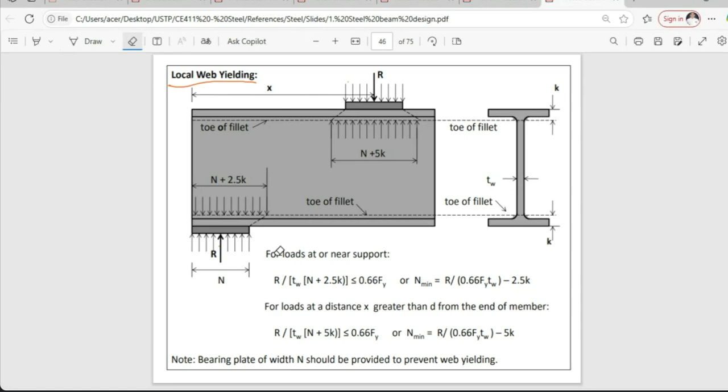Then the other case is when the concentrated load is within the span. So what I was saying is, what if, from your view, the beam is heading this direction, from the top view.

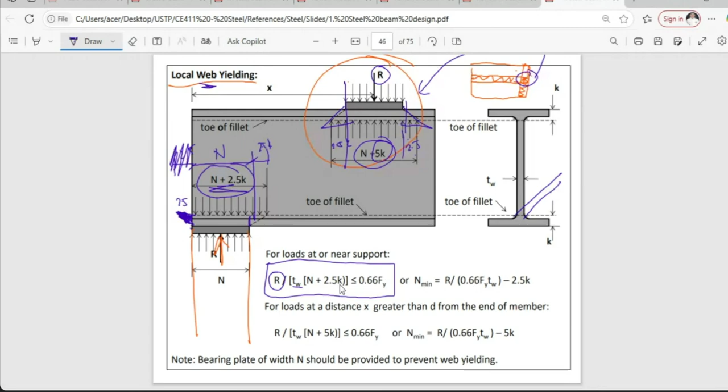K is just a dimension measured from the toe of the fillet, from the weld. When they weld to connect the I-section, this portion is welded, and that measurement going toward there becomes K - from the toe of the weld toward the outermost compression flange, that becomes K.

So, force divided by the area is less than or equal to 0.66 Fy. Simplifying this, K is given, 0.66 is a numerical factor, and Fy is also given - for A36 steel, it's 248 MPa. So simplifying, N is our only unknown with this given condition, therefore we can calculate the minimum N, which is equal to this value.

If that's the reason for calculating this dimension, regardless if it's just 0.1, it can't be rounded down. You must round up. For example, if our dimension is 55.3, normally you'd round down, but for this case, we can't round down for dimensions. Always round up here, so it becomes 56.

But again, dimensions of steel members should be divisible by 5 or 10, so most likely the 0.3 effect gets absorbed, and it will most likely become, for example, 60.

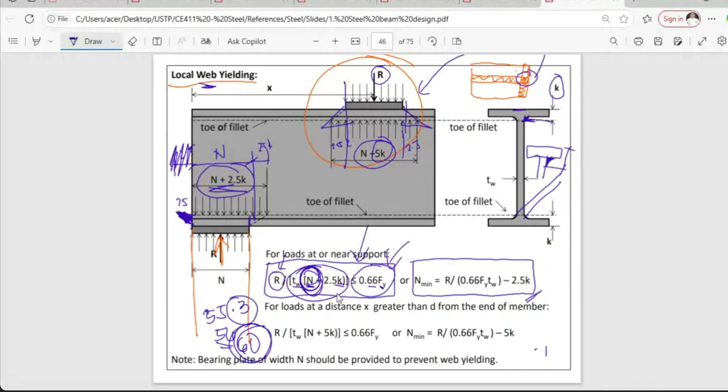As the designer, increasing this dimension will still lessen the stress, because force divided by the area, and the area is in the denominator. So increasing the value of N will decrease our stress. That's fine since our calculation requires less than or equal to.

So regardless of rounding up, it will still satisfy the condition that our actual stress remains less than or equal to 0.66 Fy, even if we round up, because it's in the denominator. Increasing the denominator will lessen the stress, so the less-than-or-equal-to condition is always satisfied.

Then the second case is similar, the only difference is this N plus 5k. As mentioned earlier, it can spread on both sides, left and right, because it is within the span. As long as the application of the force at x distance is greater than D, which is your measurement from top to bottom of the width of the flange.

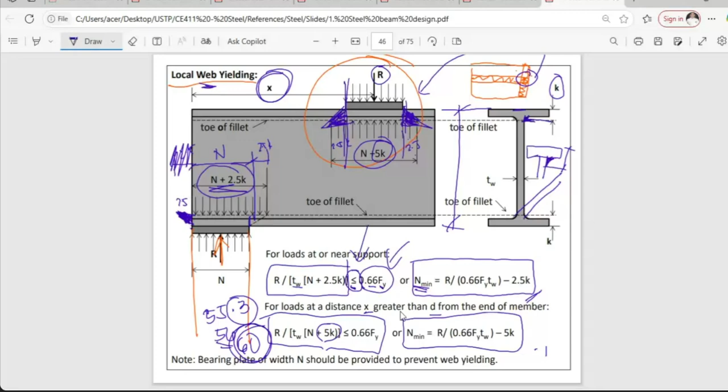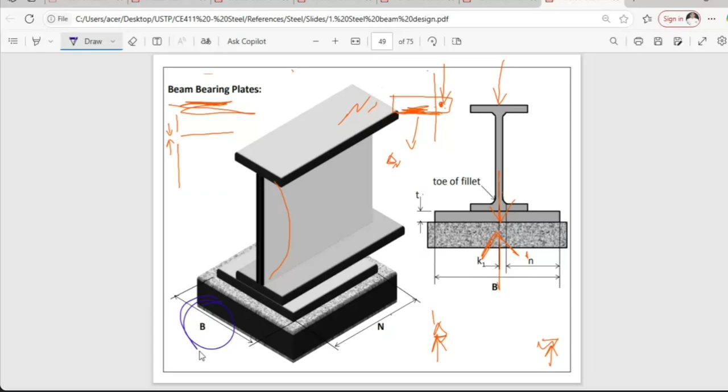So simplifying, you can obtain this. Therefore, when we design a beam bearing plate, we need to design the plate and determine the necessary dimensions. Looking at this illustration, we have a width, a base, and a length N. So our dimensions are the base, the length, and the thickness. This plate is what we need to design, as shown in this illustration.

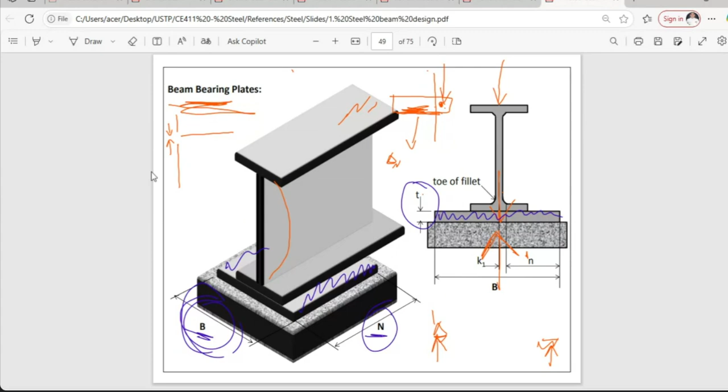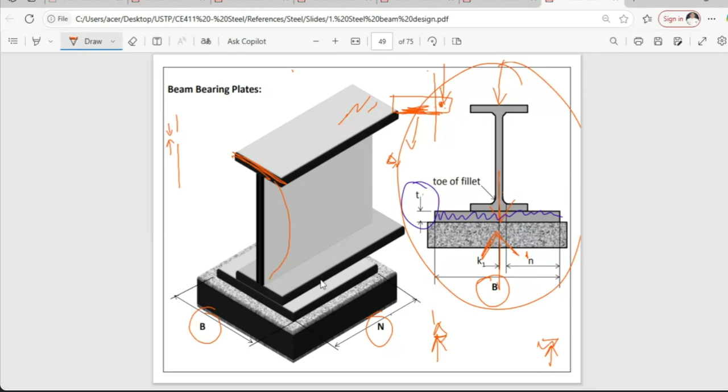So that's okay for the letter width N, which we design first. Taking into consideration that the dimensions must be correctly placed, the base B should not be interchanged. The base is the one parallel to the flange, facing that direction. The side, N, the length, is parallel to the span of the beam. That should not be interchanged. The thickness is fine since it's uniform throughout the dimensions. So we have the base and the length N.

So how will we be able to calculate its dimension? We already have N, so now we calculate the base based on the allowable bearing pressure and the actual bearing pressure.

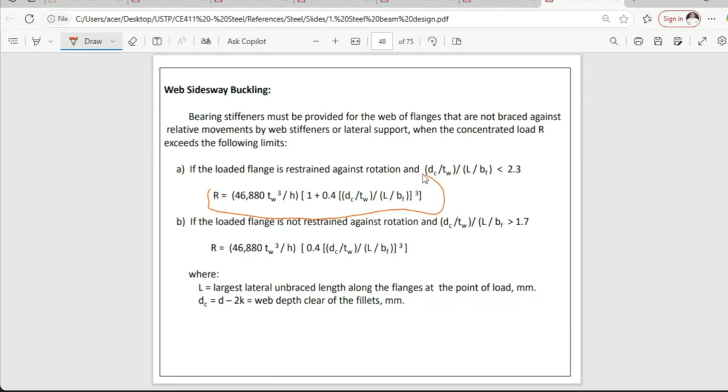This is based on the code, considering web crippling or web sidesway buckling, for calculating R. But for cases where it's given, we don't need to calculate this. This is based on how much capacity our structure has against web crippling, which is the permanent deformation, and this is also the force needed, or its capacity against web sidesway buckling. Beyond this value, it only means our structure fails based on buckling or web sidesway buckling.

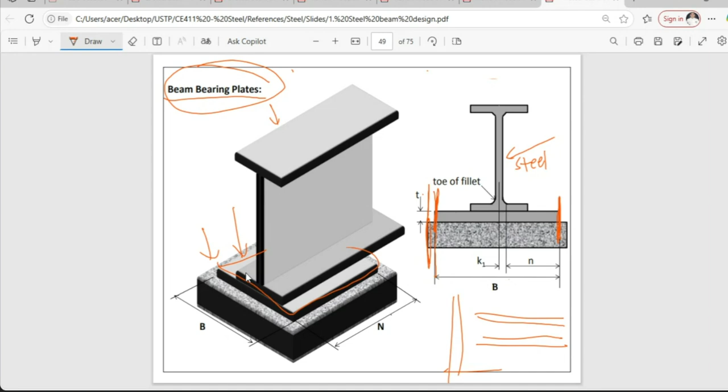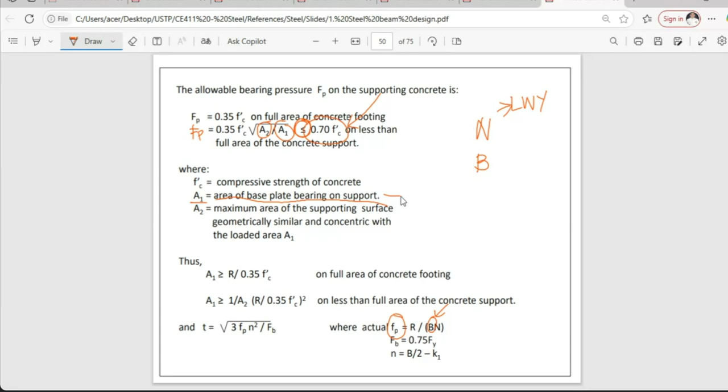Taking into consideration, the calculated allowable bearing pressure should be less than or equal to 0.7 FC prime. If the calculated value is greater, then the governing value is 0.7 FC prime. So let's calculate area 1 and area 2, wherein area 1 is simply the area of the base plate bearing on the support, that means B times N.

Area 2 is defined as the maximum area of the supporting surface that is geometrically similar and concentric with the loaded area 1. So let's illustrate this. For example, here is the area of the column, and this one is the area of the base plate. Area 2 is the maximum area that is concentric or geometrically similar to area 1.

So this blue area is area 1. Area 2, suppose, is this one, colored green. For example, if this is 350 by 400, and this one is 550, and this one is 650.

Obviously, if we enlarge area 1, the blue plate, until it reaches the edge, we get the ratio and proportion of the width, this distance x. So this is just equal to 500 divided by 350 equals x distance divided by 400.

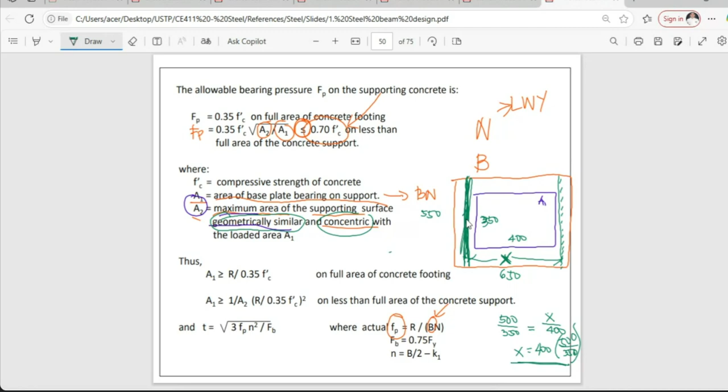And then concentric means that when expanded, the center stays the same. So when expanded from 350 to 550, we calculate how much it expanded from 400 in that portion. Again, this is just an example.

Suppose we get x equal to 571. That doesn't reach 650, which means area 1 was simply enlarged to become area 2, but it doesn't reach edge to edge equal to B and N of area 1. It would only be enlarged if the ratio of 350 to 550 and 400 to 650 were the same, but in this case it's not, so the expansion doesn't reach edge to edge. That's how we calculate area 2.

So there are two cases to consider: less than full area, or full area. For the full area of concrete footing case, it's easier to calculate because we just equate the actual and the allowable values. The actual is the force divided by the area that caters to the force.

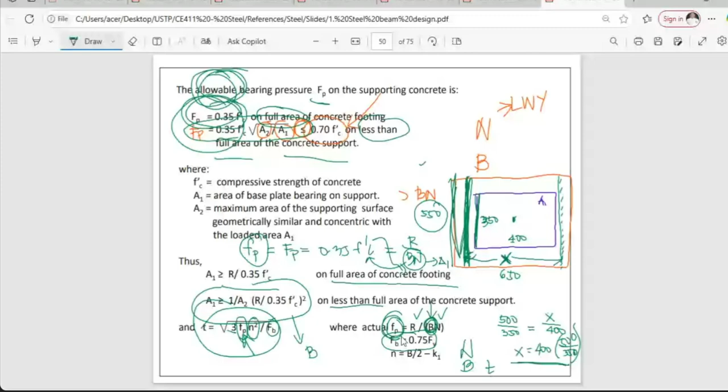So to better understand the topic, here's an example for that one.

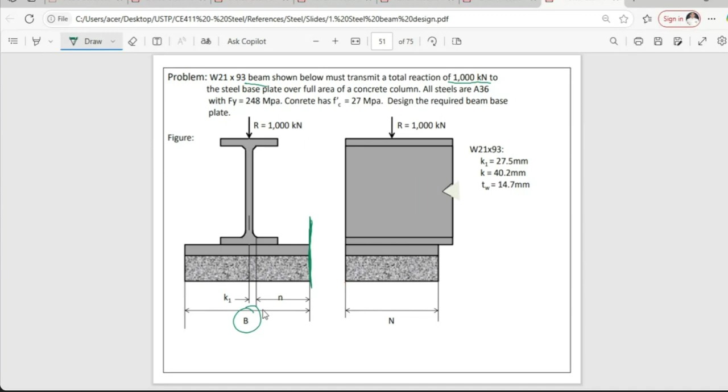So for this one, we have a wide flange 21 by 93 beam as shown below. It must transmit a reaction load nga 1,000 kilonewton to a steel base plate over a full area of concrete column. So again, as mentioned, when we say full area of concrete column, sagad ang ato ang dimension. That only means nga ang atong calculation nga base ug ato ang length is nakasagad siya from edge to edge sa ato ang column. As mentioned also in the problem, all steels are A36 steel with yield stress nga 248 MPa. Concrete has a compressive strength nga 27 MPa.

So design the required beam base plate. So therefore, we need to design a B, the N, and then the thickness. As mentioned earlier, ang pinakauna to makalculate is si N, which is due to the consideration ni local web yielding. Kana atong una i-calculate, which is through this one. To obtain N, which is the local web yielding requirements, kanino si actual nga stress, it should be less than or equal to the allowable. So equating that one, we can calculate for the minimum value of N.

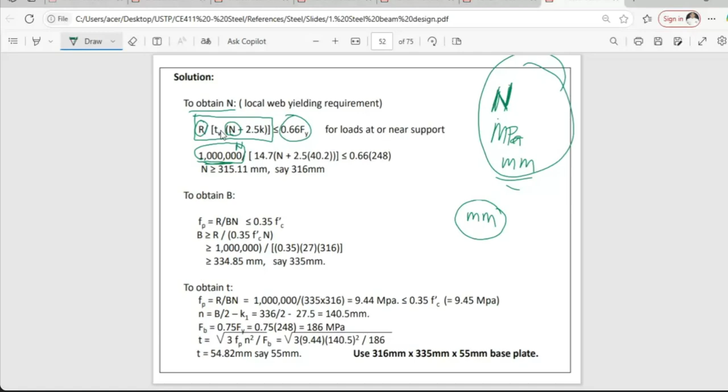So we have the 1,000 kilonewton. Pag mag-input gid ta og value, all values must be in Newton, in MPa, and then in mm. Karon kay atong i-calculate is dimension man, so therefore, ang dapat mo-yield ang answer kung kani atong ipang-input kay dapat atong dimension nga mogawas kay naka mm. So therefore, katong atong load instead nga kilonewton, dapat atong i-input is naka Newton. So we have the R na naka 1,000 kilonewton, converting to Newton, so times 1,000, natay 1 million Newton. Divided by the thickness of the web based on the given problem.

Thickness of the web is this one, equal to 14.7 mm. And then, times the N plus 2.5K, where K is also given sa problem. Just in case nga dili directly given, dapat kabalo ka unsa ni pagkuha sa K. Kung sa illustration siya ibutang, mo na siya si K, from fillet, toe of the fillet padulong sa top sa flange, top of the compression flange. Mo na siya si 40.2 mm. And then we have the K1, which is measured diri gapon from toe but sa tunga na, na si K1.

So here, simplifying this one, we can obtain an answer equating one equation with one unknown. So we can now solve for the value of N, where it should be greater than or equal to 315.11. Pag input na sa mga values, 0.66 Fy, N na lang ang unknown. One equation with one unknown, you can calculate for the N, nga it should be greater than or equal to 315.11 mm. So say, natay 316, para pag-input diri. But take note, nga later sa final answer, dili ta pwede magbutang og kanino, kay all answers in the dimensions is dapat divisible by 5 or divisible by 10.

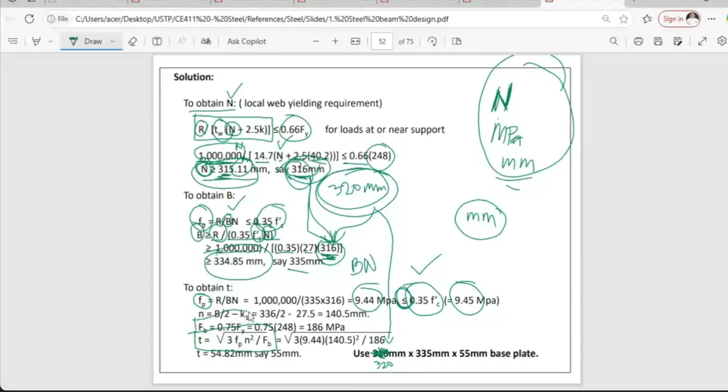Now, the last dimension to calculate is the thickness, using this formula: square root of 3 times fp n squared over Fb, where Fb is your allowable bending stress, which is equal to 0.75fy. This is only applicable for cases where the web of the steel I-beam is exposed to a concentrated load.

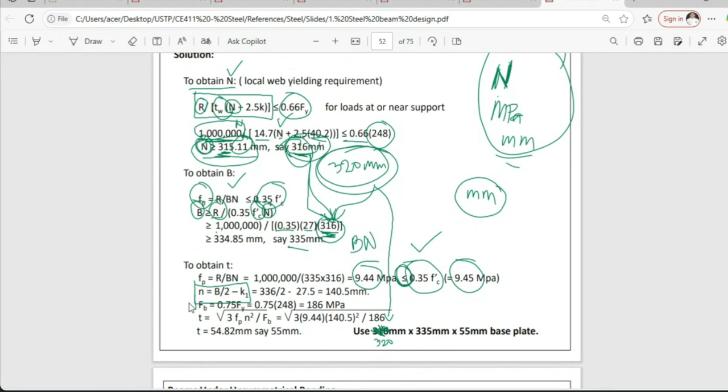Then n is in this formula. So n, by the way, in case you forget the formula for n, if you understand it, you can calculate it - this n is measured from the toe of the fillet going to the edge of the dimension of your plate.

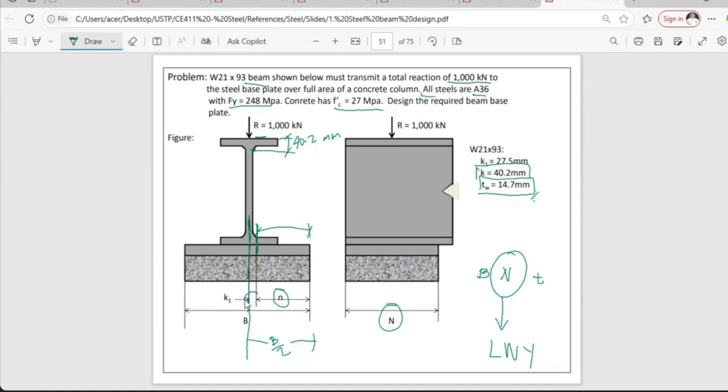So taking into consideration that this measurement is b over 2, since it's taken from the half, we get this dimension, b over 2, and then we minus this dimension which is equal to k1. So this is just in case you forget the formula - if you understand the illustration, that's also okay. So b over 2 minus k1, simplifying, you can obtain 140.5 mm.

So now we have the thickness. This one is 0.75 fy, and the already calculated fp is 9.44. Simplifying, we can obtain the thickness of 54.82 mm.

Again, as mentioned, for dimensions we need to round up so that the output should be divisible by 5 or 10. So we round up to 55. Therefore, we will be using the dimension of your base plate: 320 mm by 335 mm by 55 mm base plate.

So that will be your so-called beam base plate against the concentrated load application. Any question?

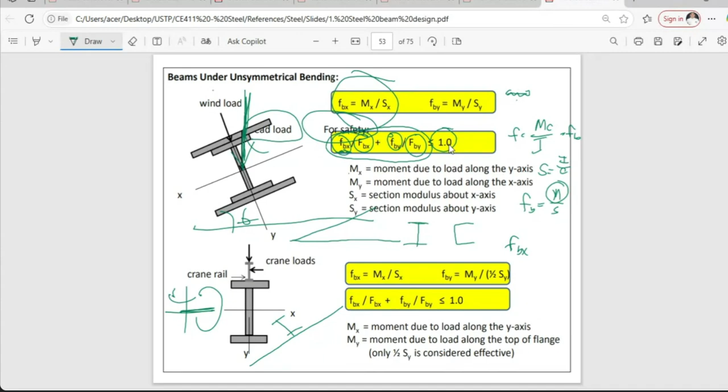Which is through this formula: your factor of safety should be less than or equal to 1 para makaingon ta nga safe pa siya. So your FBX should be divided by actual divided by allowable along x, and actual over allowable along y should be less than or equal to 1.

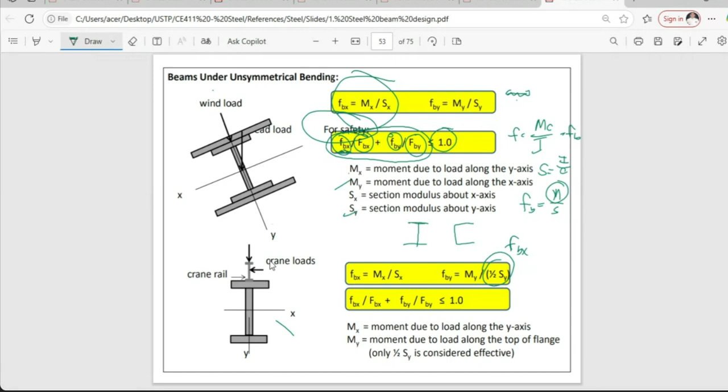Same goes as kaning case, but for this case lahi atong consideration nga only half of your y due to effective area, moment due to load along top of the flange. Di ba sa atong flange, ka-remember mo atong width nga ginagamit is just half. So atong consideration sa structure, only half of it ang gina-consider niya. Ang atong base BF nga gina-consider sa width to thickness ratio gina-half na to siya, no? So ato pong SY diri along y-axis lang is half, no? Kanina tong y, so y man siya tungaon.

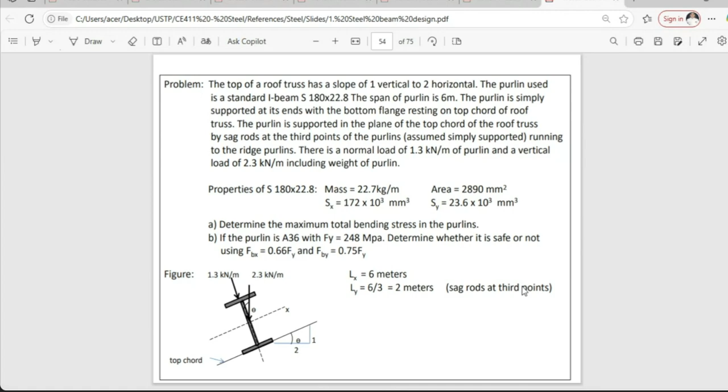That's why ang atong section modulus is 1/2 of SY na lang ato ang i-consider. So pareha ang formula in terms of safety, but the only difference is ang pag-calculate ni FBY, half of SY na lang ato ang i-consider. So to better understand that, natin example, sa next meeting na natin na siya i-discuss. But I will still upload this earlier para maka-catch up mo daan. So any questions from the class?